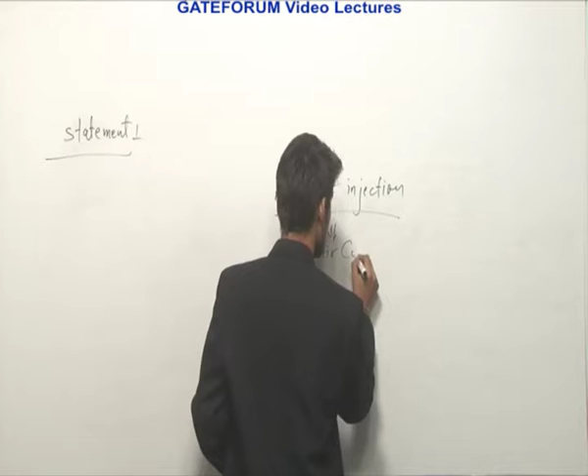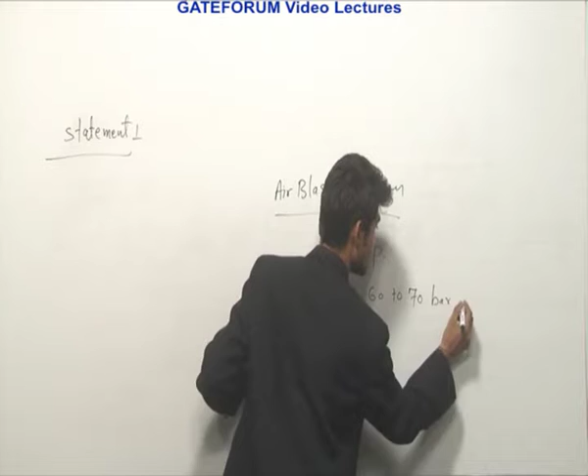Yes, it is correct. In air blast injection systems, air compressors were used to increase pressure of air up to 60 to 70 bars. Here the range given is 6 megapascal, that means 60 into 10 power 5 pascal.

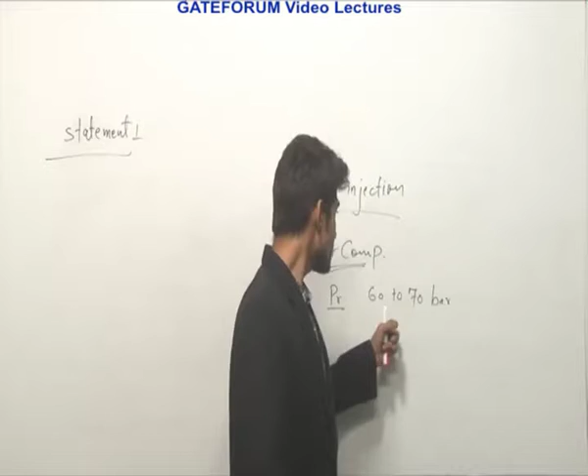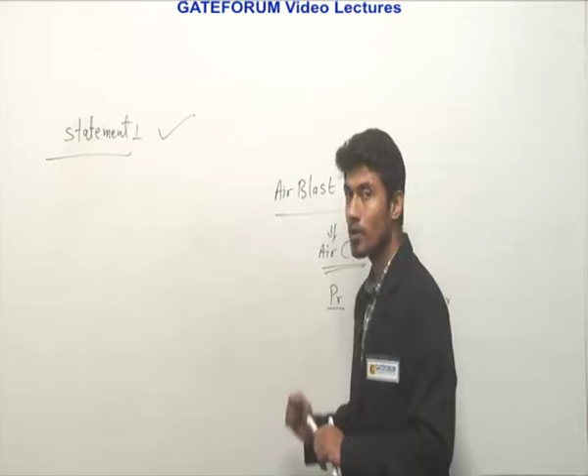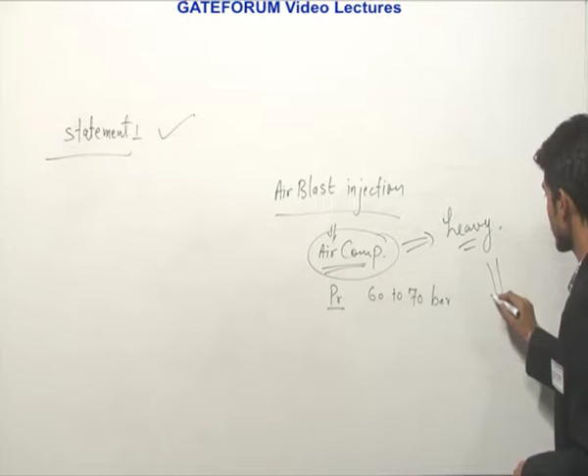That is 60 bar only. So statement 1 is correct, and it is a point to remember that air blast injection systems are not used nowadays in CI engines since they use a heavy air compressor, and due to this efficiency becomes low.

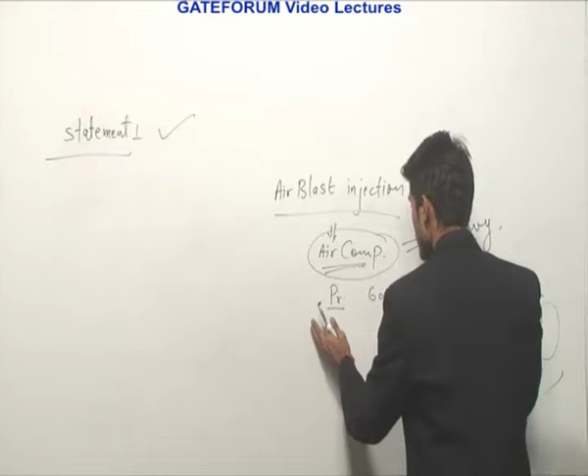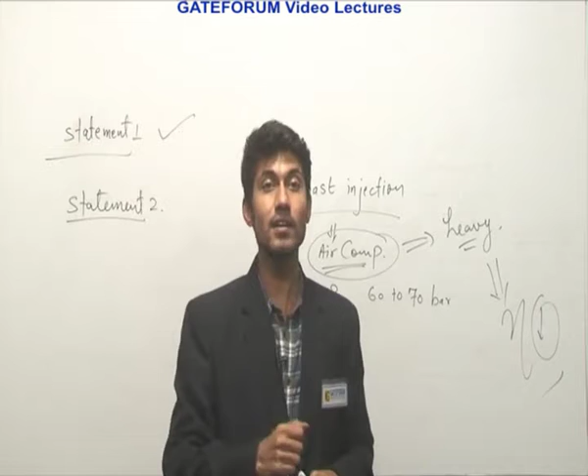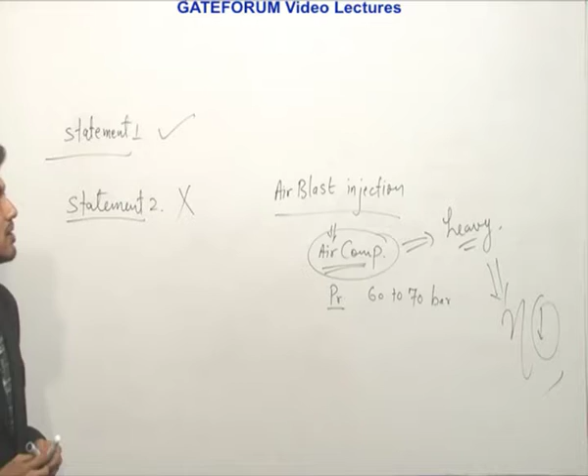So your overall efficiency becomes low since you use a very high pressure to inject. Now statement 2 says that in solid injection system it is heavier as it needs increasing the fuel pressure to 30 megapascal. The word written, that the solid injection system is heavier, is false, because solid injection system is a system which is better than this air blast system.

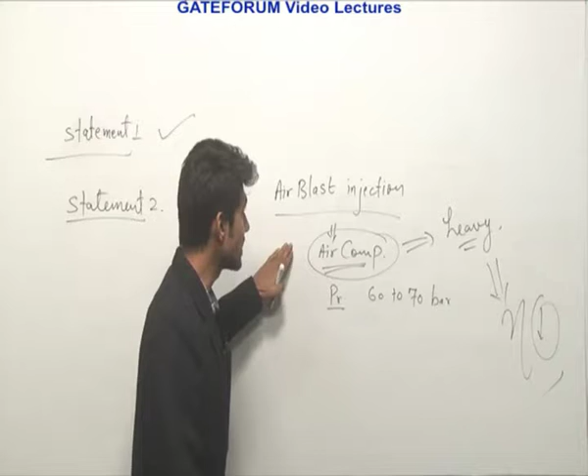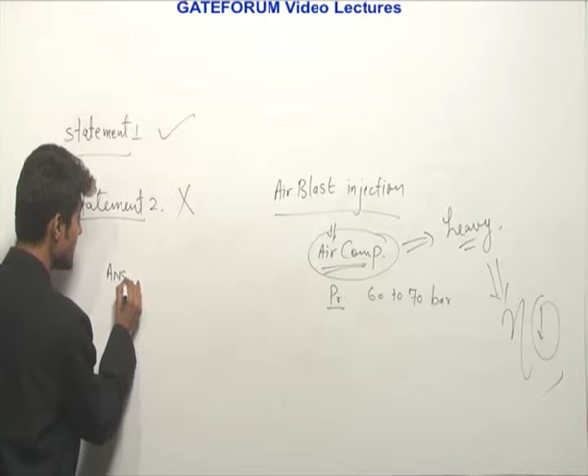The reason why air blast system was rejected is that it was heavy, it used a heavy compressor. That problem was eliminated, and solid injection system is not heavier than this air blast injection system. So our answer will be option C, which suggests statement 1 is correct and statement 2 is false.

While turning a 60 mm diameter bar, it was observed that the tangential cutting force is 3000 Newton and the feed force was 1200 Newton. Now please do not get confused in these terms, one is cutting force, one is thrust force.

The usual nomenclature which we use is cutting and thrust. So cutting force is 3000, thrust force is given 1200 Newton. If the tool rake angle is 32 degree, then the coefficient of friction is nearly.

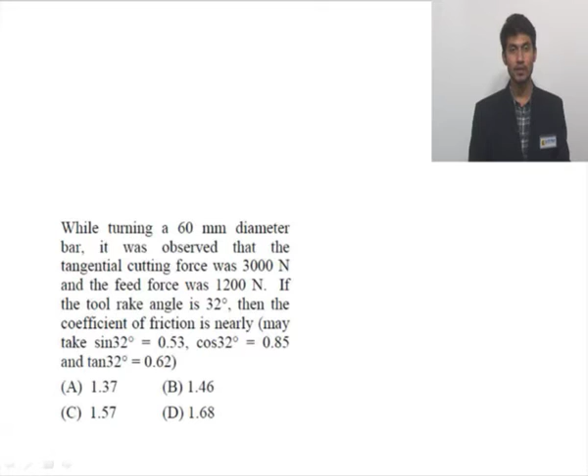The values for sin theta, cos theta and tan theta are given to you. You can utilize these values and find out what is tan theta and what is the value of mu. As we know, coefficient of friction is equal to

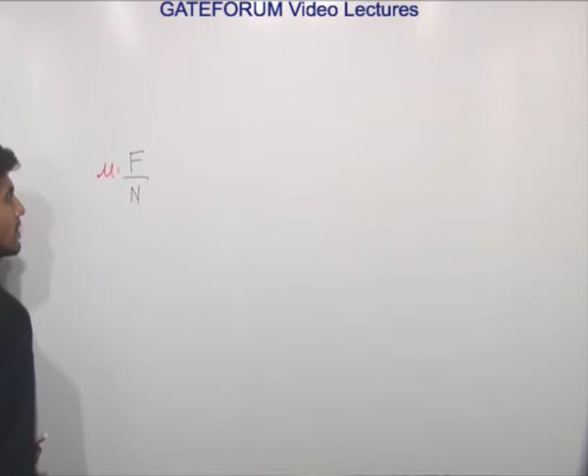F by N, it is frictional force divided by normal force. Now how to find out this frictional force and normal force? There are formulas: Fc sin alpha plus Ft cos alpha, and Fc cos alpha minus Ft sin alpha, where alpha is the rake angle.

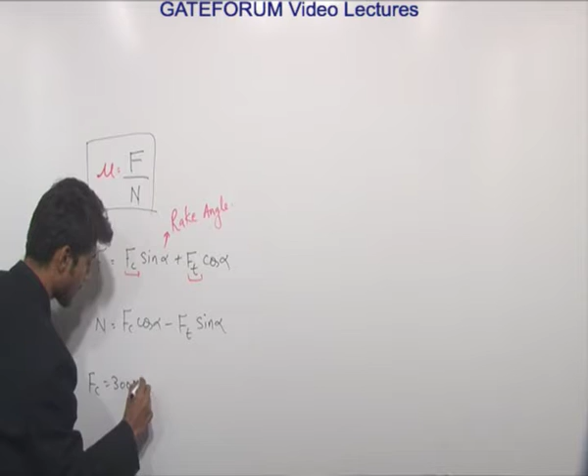Okay, Fc is cutting force and Ft is thrust force. In our question, Fc is given as 3000 Newton and Ft is given as 1200 Newton. By putting the values...

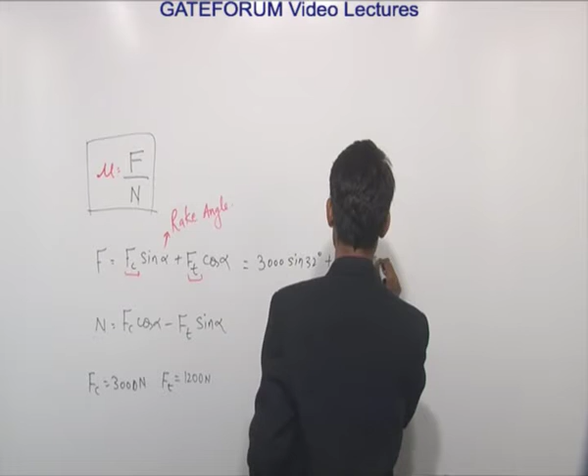3000 sine of 32 degrees plus 1200 cos of 32 degrees, you will get around 2610 Newton, approximately. The values are with you, sine 32 and cos 32, already given.

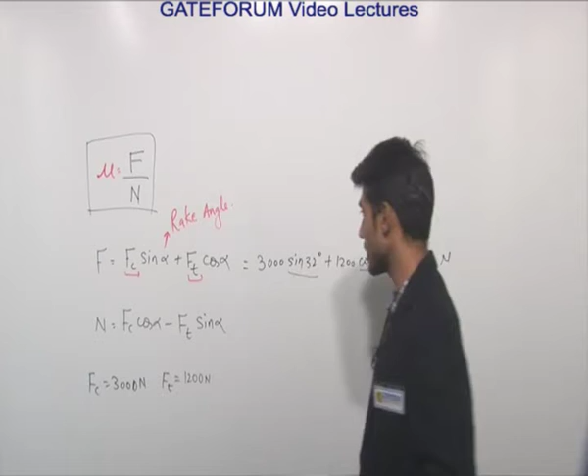From here, 3000 cos 32 minus 1200 sine 32, this value will be approximately 1914 Newton. Now the values are with you.

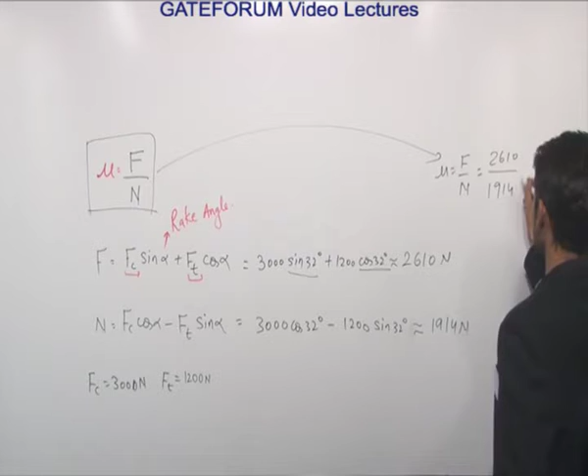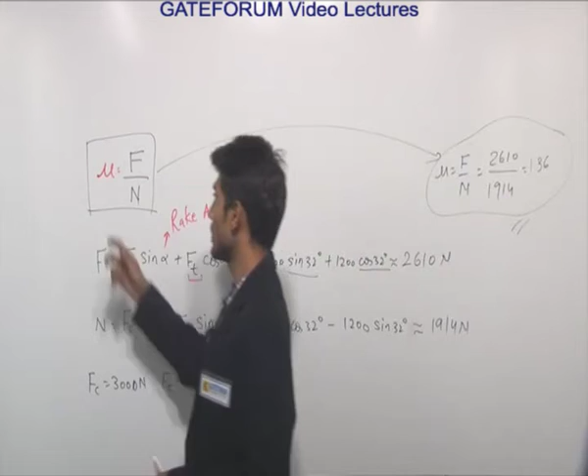To find mu is equal to F by N, value of F is 2610, value of N is 1914. By dividing these two, you will find mu equal to 1.36. So the value of coefficient of friction is nearly 1.36.

So the final answer will be option A. Option A will be correct.

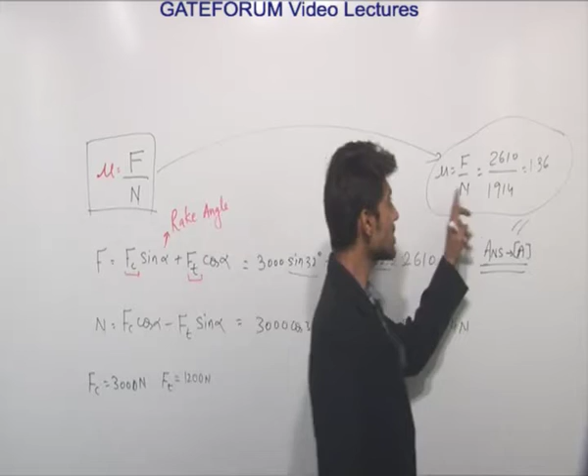Here you can see that mu, coefficient of friction, is more than 1. It is rare, and if it were the only option with mu greater than 1, you would have simply picked it. But in this question, all the options are greater than 1, so since 1.36 or 1.37 is given in option A, option A will be correct.

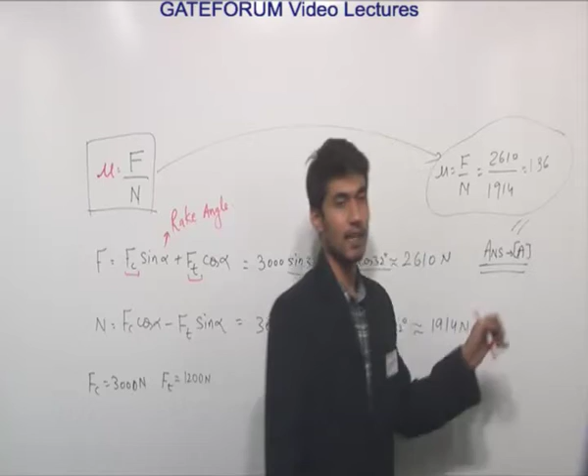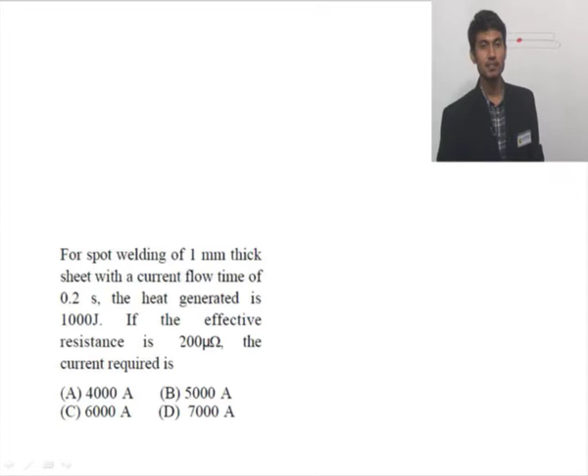For a spot welding of 1 mm thick sheet with a current flow time of 0.2 second, the heat generated is 1000 joules. If the effective resistance is 200 micro ohm, the current required is...

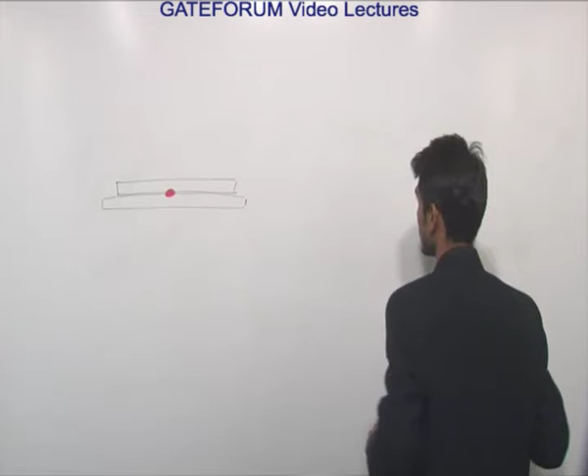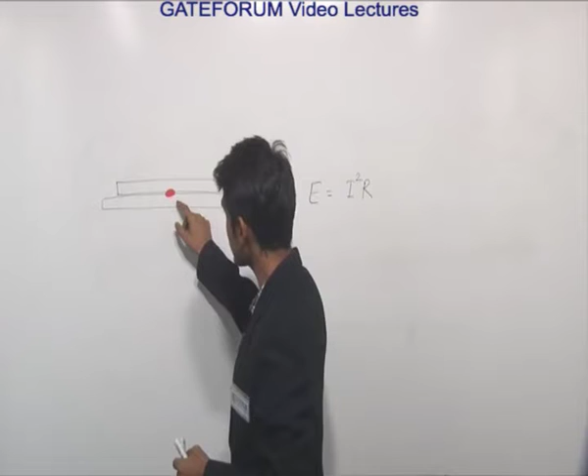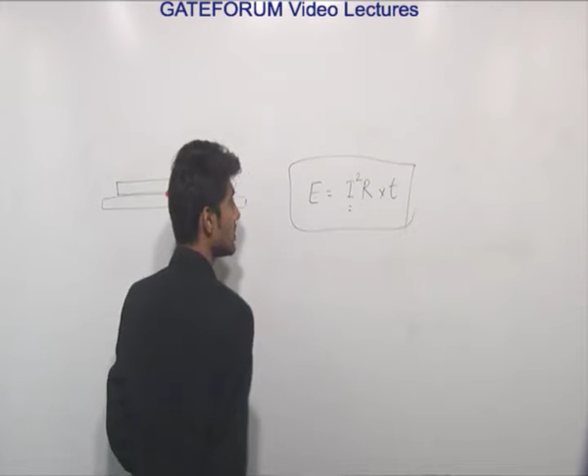So energy will be I square R, that is power multiplied by time. In this formula almost everything is given but the current. So energy, that is 1000 joule, is given in the question. I square is what I have to calculate. R is 200 into 10 power minus 6 ohm. Time is given as 0.2 seconds. I can solve the values from here.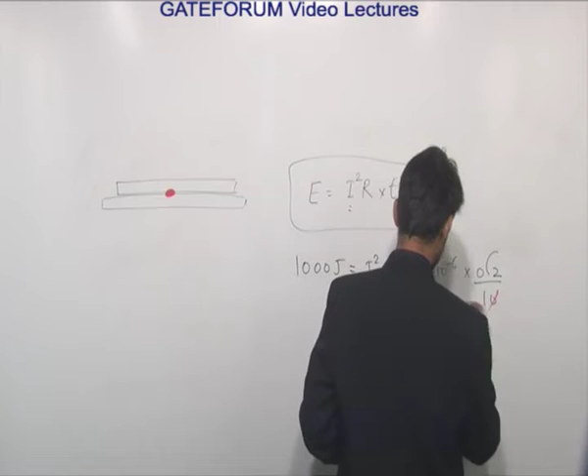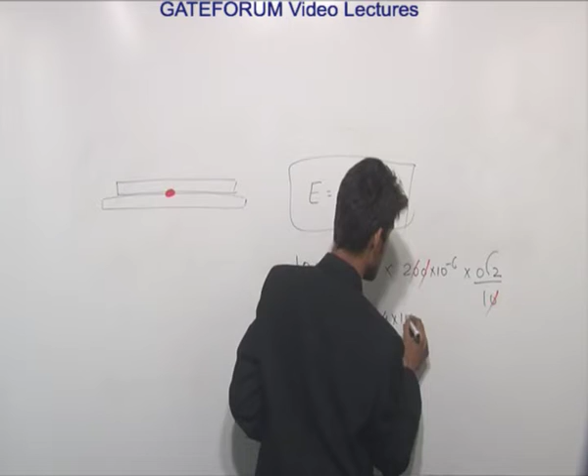It will be 100 is equal to I square into 4 into 10 power minus 6. If this minus 6 goes here, it will be 10 power 8, and 1 by 4 is equal to I square. This can be written as I equal to 1 by 2 into 10 power 4. I can write it as 5000 ampere also.

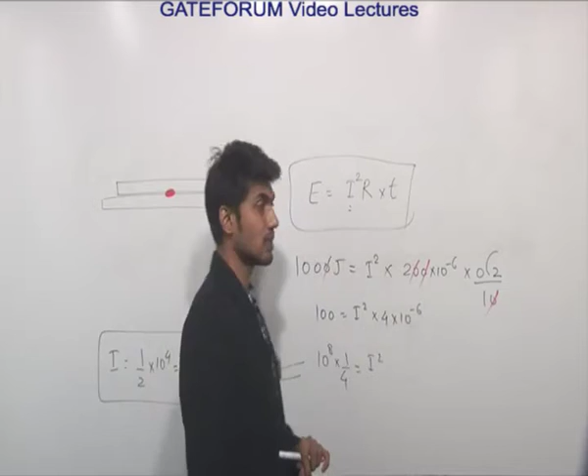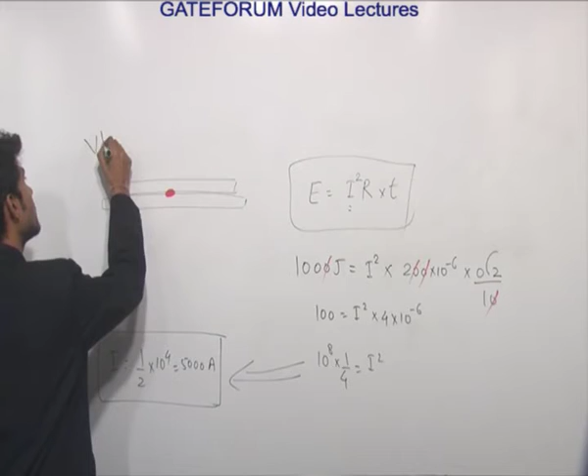So if 5000 ampere current is applied, just look at the magnitude, and if resistance is less, 200 into 10 power minus 6 ohm, then the energy generated here will be 1000 joules. In such cases, voltage is kept very low, and current is kept very high. This is the principle used for spot welding. So our answer will be option number B, 5000 amperes.

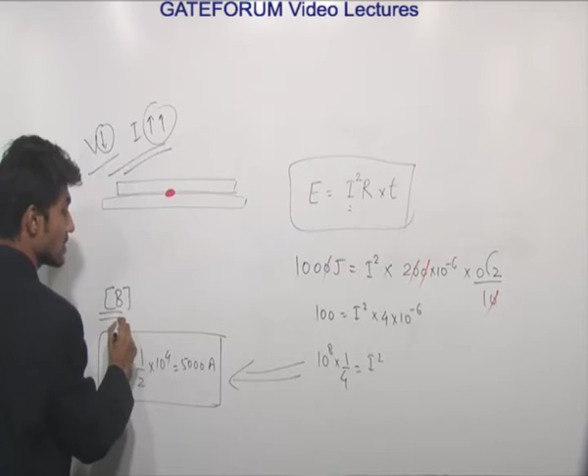The maximum possible draft in rolling, which is the difference between initial and final thickness of the sheet metal, depends on: rolling force, roll radius, roll width, or yield shear stress of the material.

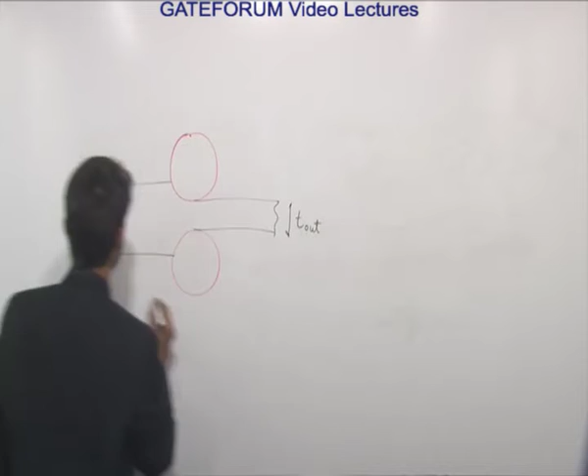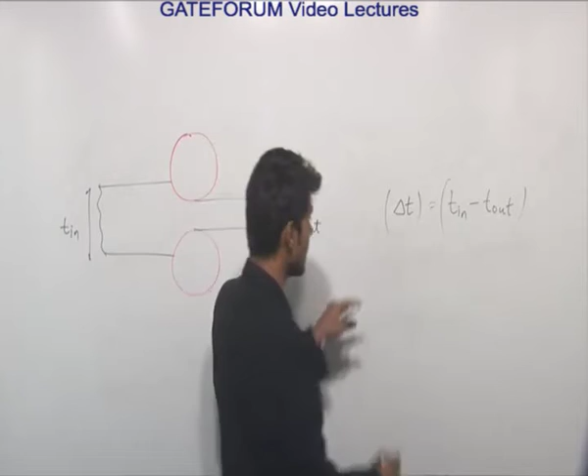In the rolling process, I am having 2 rollers with me here and some material entering the roller, and there will be some output. If the thickness here is T out and thickness here is T in, the question states delta T is equal to T in minus T out, and the maximum possible value of this is a function of, which is what is asked in this question.

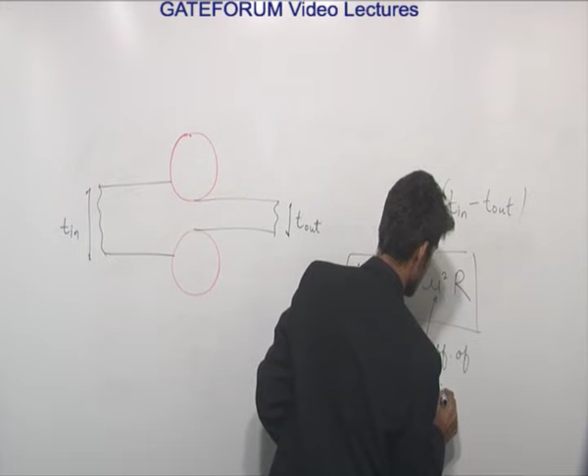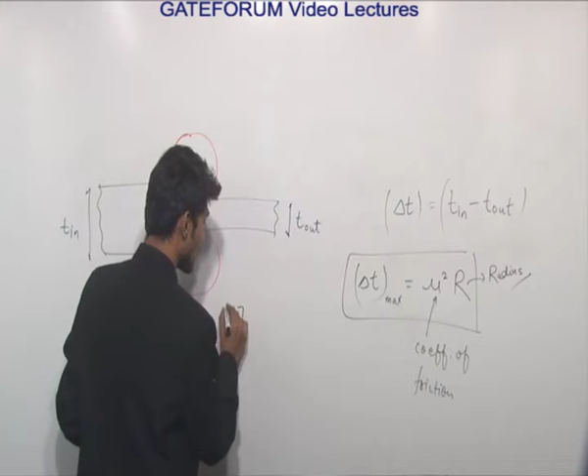So delta T max is equal to mu square into R. It is a relation with us, where mu is coefficient of friction and R is radius. So in the given options, option B matches, that is roll radius. So our answer will be option B.

Consider the following statements. Dispatching authorizes the start of production operation by: first, releasing material and components from stores to the first process; second, releasing the materials from process to process; third, issuing of drawing and instruction sheets.

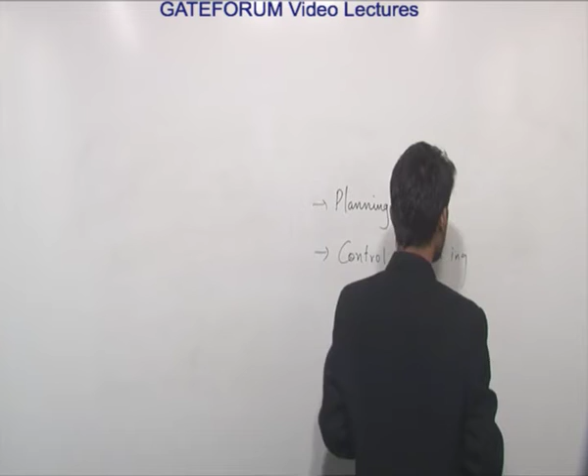In production planning, dispatching is very important as far as planning orders, and then control and issue. Controlling and issuing the orders as well as planning - for all of this, dispatching is the single term used in production planning.

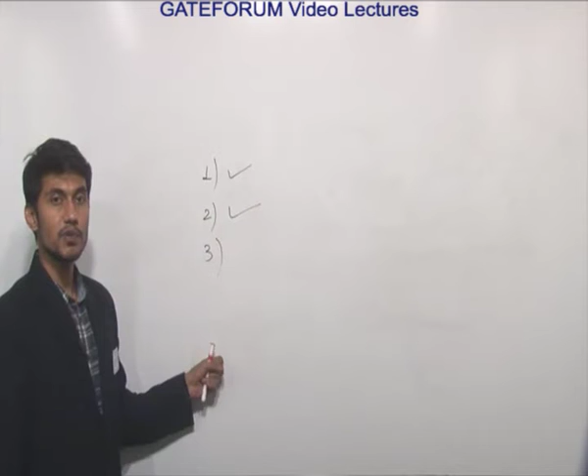With respect to this fact: releasing of material and components from store at first place - yes, before starting any production you need this material release. Second, releasing of material from process to process - yes, in between processes also materials are required. And third, issuing of drawing and instruction sheet. Dispatching is a kind of authority, or a kind of paper which a production manager has in hand, and when dispatching is done, the process gets started - it is the actual start of the process. So for the actual start, all three components given here are needed. So the correct option will be D.

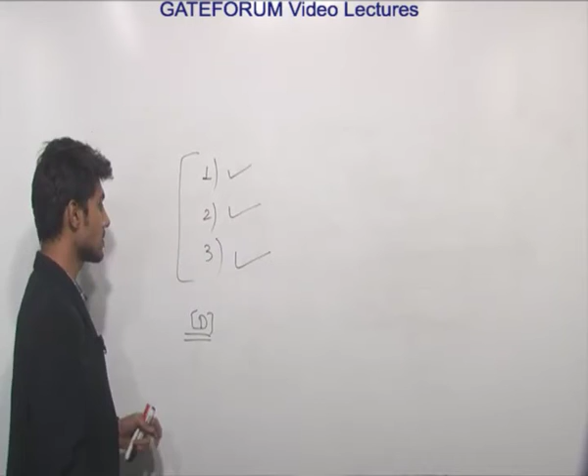Such questions are quite confusing also. In such questions, all three statements are part of one single statement only. So for this particular one, the answer goes with D.

The material removal rate will be higher in ultrasonic machining process for materials with: higher ductility, higher fracture strain, higher toughness, or lower toughness. This is an unconventional or non-conventional machining process.

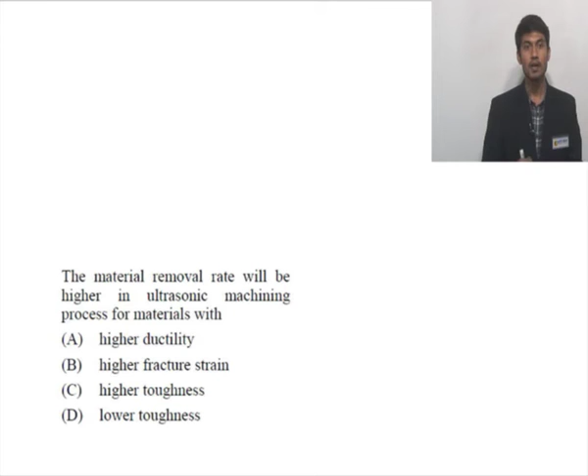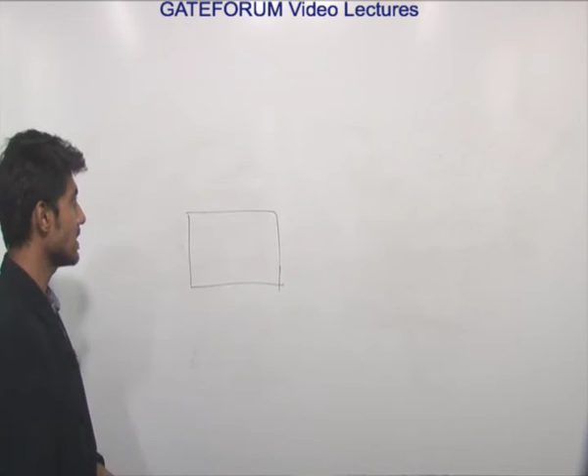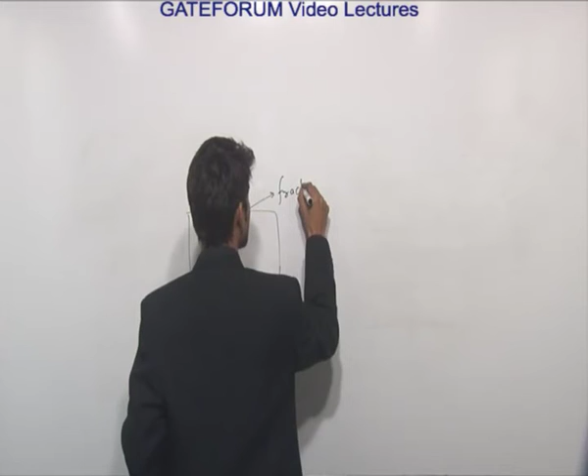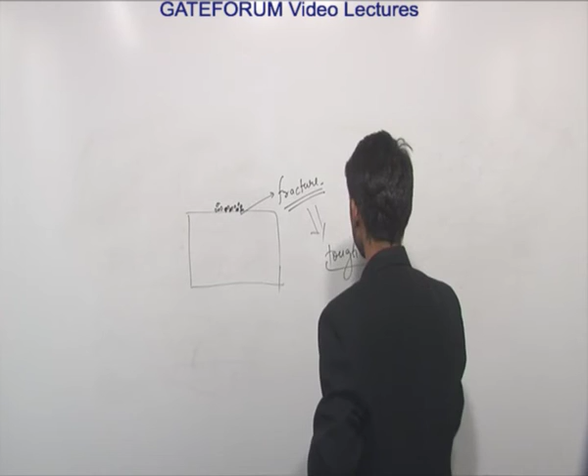For any material to be cut by ultrasonic machining, we use a process in which constant hammering is there, with help of abrasives - abrasion happens here, and constant hammering is there. In this process, fracture is the phenomena by which material is removed. Now this fracture is directly associated with toughness, because if toughness is high, that means energy required to fracture the material is high, and if toughness is low, that means energy required to fracture the material is low.

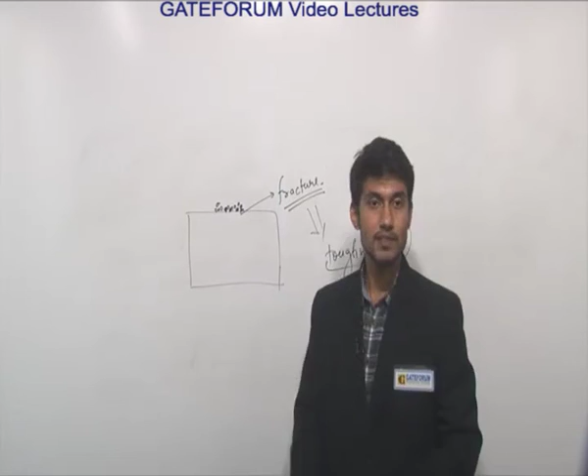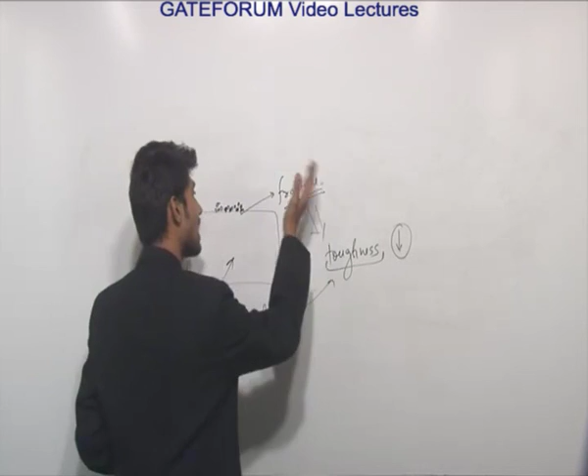So for our particular application, if we want material removal rate to be higher, the material should be having lower toughness. If lower toughness is there, fracture will happen with lesser energy and a high rate can be formed. So the answer will be D, lower toughness.

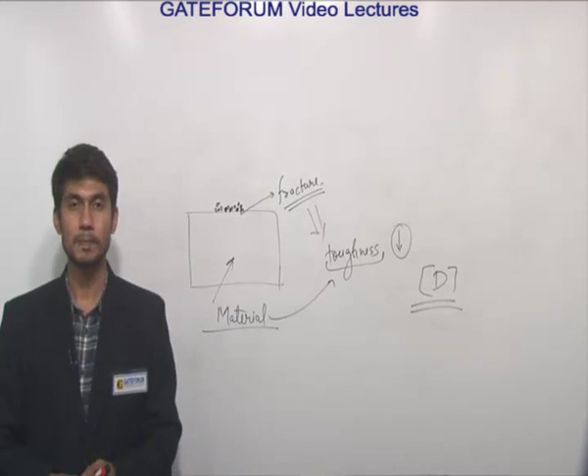Tool signature is: option A, a numerical method of identification of tools; B, plan of the tool; C, the complete specification of the tool; D, associated with the tool manufacturer.

Now this question is specifically defined in ASA. American Standard Association has defined tool signature as a numerical method of identification of tool. So there is no point to discuss any other option. Final answer will be A.